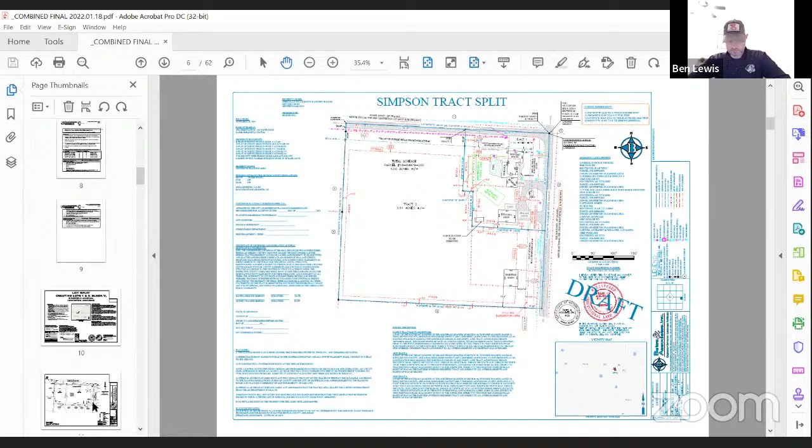This is John. I motion to approve the ratification of admin approvals as prescribed. This is Ben, I'll second. We have a motion and we have a second. Is anyone opposed? All right, thank you guys.

Under old business, we have the subdivision 2106 Crystal Cove Townhomes adjacent street agreement. This is from the southwest corner of Kinyon and Keller Road. It is zoned RTH MF12, 195 multifamily townhome lots, 30.99 acres, and the developer is TriStar Engineering, I guess Swope as well. Who's going to cover this from the staff?

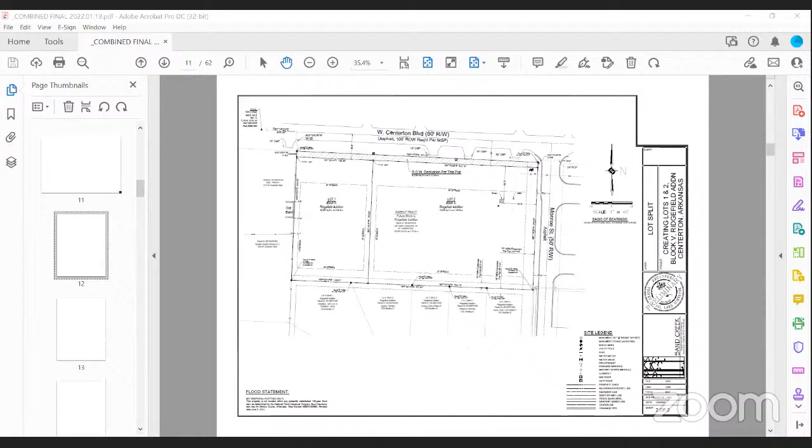I will. This is Diane, and I'm trying to look for the packet I just made for that and combined in here, and apparently my computer decided it didn't want to do that. And Jeff, did you want to go over the Zoom meeting instructions now or when we do the public hearing? I'll do them here in just a second when we do the public hearing. All right, I just wanted to double check since it's been a bit.

Now, where did it go? Hang on just a second and I will bring it up. We were working on this until about 10 minutes before the meeting. So let me go find where it got saved. Oh, I better know where it went.

While you're looking, Diane, I will go ahead and cover these since they're up on the screen. Thank you, I'm sorry.

Because we did go virtual this evening, there are going to be two public hearings. They actually involve the same parcel. So when we get to the public hearing, there will be a comment section, and there are two ways that you can ask questions or share comments, listed on the screen here. One, if you joined us virtually, there's a raise the hand button at the top, and once you press raise your hand, we can recognize you to speak. If you joined by telephone, you can press star 9 and that will raise your hand, and then you can be recognized. We only see the last 4 digits of the telephone, so we'll recognize you by telephone number. If you do speak, either virtually or by phone, we ask that you state your name and your address and/or interest in the property being discussed.

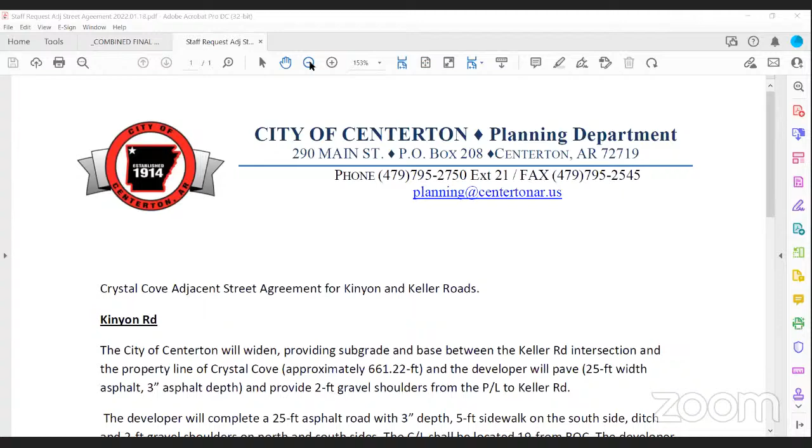Can you see my screen that I have up there? Yes. All right, we did just meet with Phil Swope this afternoon, just a few minutes before this meeting, and this is what was finally agreed upon for Kinyon Road and Keller Road. This is the Crystal Cove Townhomes. It's kind of an L-shaped that meets up with Keller on the west, Keller on the east, and Kinyon Road on the north. So they would be doing improvements to a portion of Kinyon Road and then a portion of Keller.

They will be doing, but now apparently the City of Centerton—correct me if I'm wrong, Phil, from what we talked about earlier—you guys are going to be doing all of the improvements yourselves for Kinyon Road, correct?

Let me allow him to talk. I've hit that, okay, thank you. Yes, that's right, Diane, that is what we agreed to.

Okay, so that's different than what it says here though, if I'm correct, because we just worked this out this afternoon, like 10 minutes before this meeting. So your statement is different than what's on the screen. Correct.

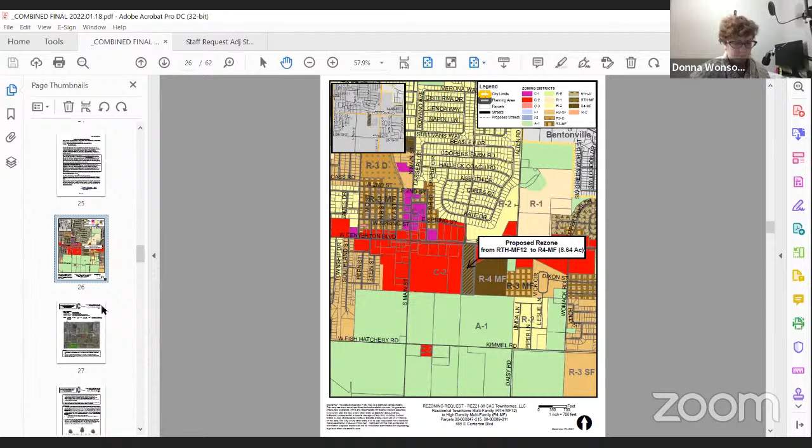So the request is for RTH to R4MF. You did see this one previously in February of this year, where it was rezoned from agriculture to RTH MF12, so that was a fairly recent change. There is the concurrent request to the PUD, which you'll be hearing after this one if this passes. The intent is to develop the property as a second phase of the Stoneleigh apartment complexes, which are immediately adjacent to the east.

The high density multifamily R4MF has a maximum density of 18 units per acre. The proposal is consistent with that. R4MF is subject to general regulations and design standards, which is a recent change to the zoning we adopted. The parcels are currently only accessible through the Stoneleigh apartments, as this is considered phase 2 of that. We're not seeing any real issues with that. Access to the apartments is off of Centerton Boulevard, Highway 102, which is a major arterial.

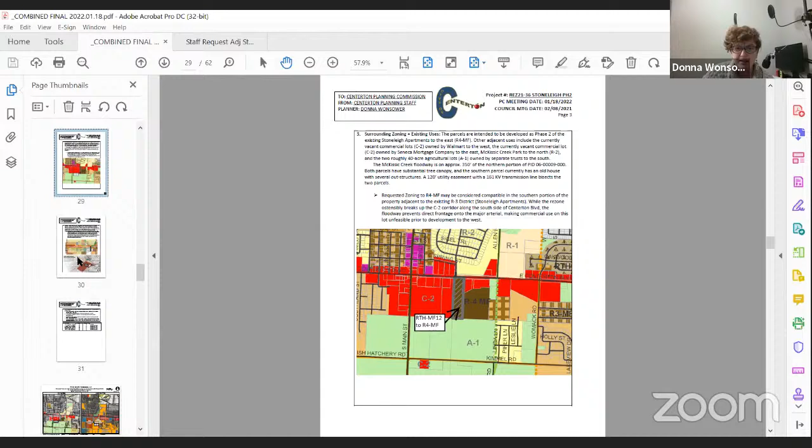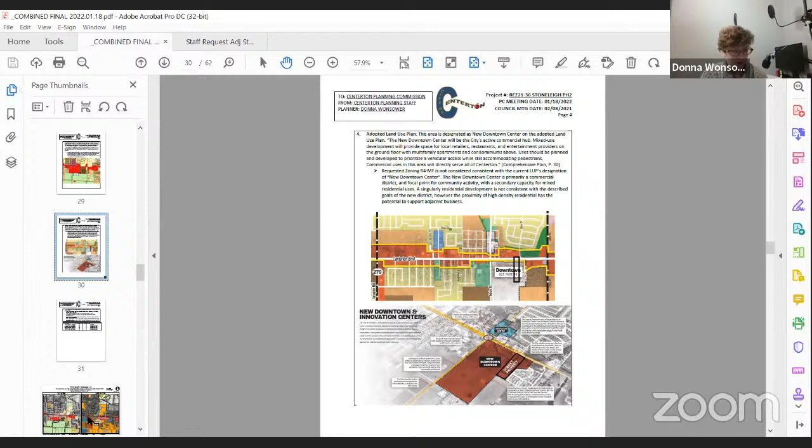So staff considers R4MF compatible, given its proximity to the adjacent Stoneleigh phase 1 and its location off of the Centerton Boulevard corridor. For the adopted land use plan, this area is designated as the new downtown center, described as the city's active commercial hub. There's a heavy emphasis on mixed use. There is some description for multifamily, but it really is a priority towards commercial and mixed use. So given that, the requested zoning is not considered consistent, but it is directly adjacent to the Stoneleigh, and it's kind of on the edge of the downtown center, so it does have the potential to support adjacent commercial within the downtown center. That's something to consider when reviewing this.

So that is the gist of the staff report. If you have any specific questions—there is a wetland, but the general area is outside of it. So if you have any questions, let me know. All right, thank you, Donna.

We will go ahead and open it up to the public now. So with that, I would entertain a motion to open the public hearing. This is John, I motion to open the public hearing for rezone 2136. This is Ben, I second. We have a motion and a second to open the public hearing. Is anyone opposed? All right, thank you for that.

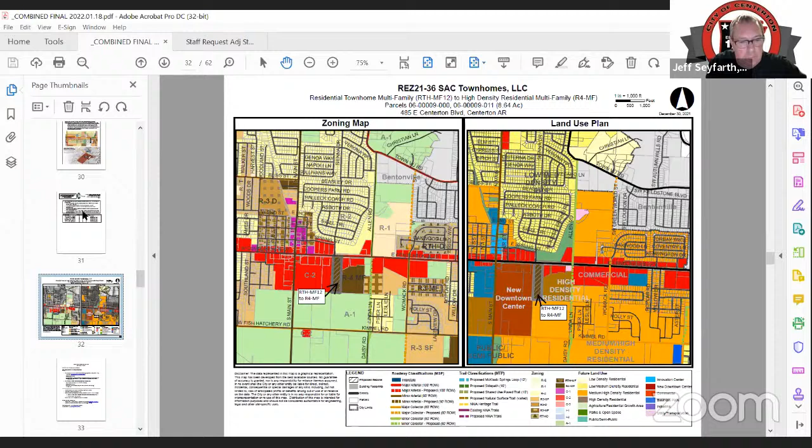All right, let's go through our questions that we need to consider for the rezone from RTH MF12 to R4 multifamily. The first one: is the rezoning consistent with the adopted comprehensive plan, including the adopted land use plan? If not, why?

I remember back when we went through this discussion that this parcel was rather unique with the fact that it had the power lines, it had some water. At that time we also knew the potential for a new downtown to the west would make this a unique piece. If I remember correctly, we asked for direct access from the property that would allow for the growth of that potential new downtown. So while not directly the same as the new downtown area, it would allow for that potential development whenever we went through the first rezone.

So with that, I think there's really a mixed view in regards to this. I would open it up for any of the other commissioners' comments on that.

Jeff, I agree with you. I think with the shape of the parcel and the adjacency to the existing apartment complex, it makes it a difficult one to not integrate into it.

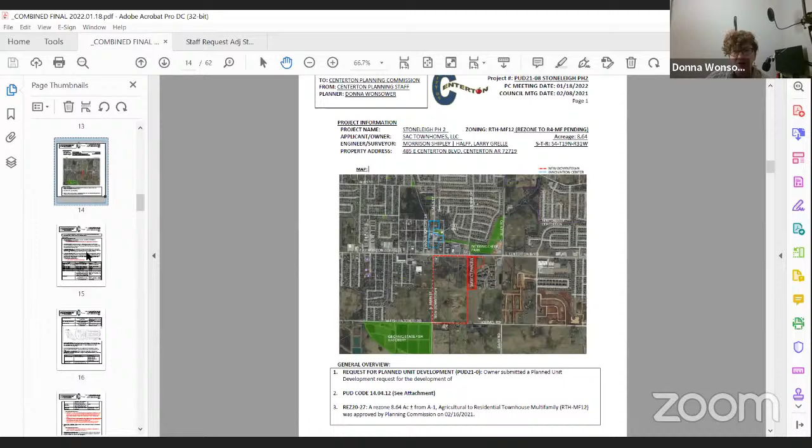So the request is for phase 2 of the Stoneleigh Apartments, as was previously stated. It encompasses 2 parcels. Staff is recommending a lot combination plat prior to construction to simplify the process and make sure those 2 parcels are combined since it is being done as one development.

The uses are multifamily residential. This is consistent with the underlying zoning. With a PUD, the ownership is required to be in single or corporate ownership at the time of filing. This PUD is consistent. The design proposes access from the existing Stoneleigh Apartments with a series of loops around the townhome units south of the large electrical easement, with a spur to the north.

As the development is acting as phase 2 of the existing Stoneleigh Apartments, staff is recommending approval of the reduced side setback to the apartments. So there are a couple of variances which we can make some changes to the setbacks and such with the PUD code. Mostly with side setback, there is a reduction from 25 foot to 15 foot being proposed on the side adjacent to the existing Stoneleigh phase 1.

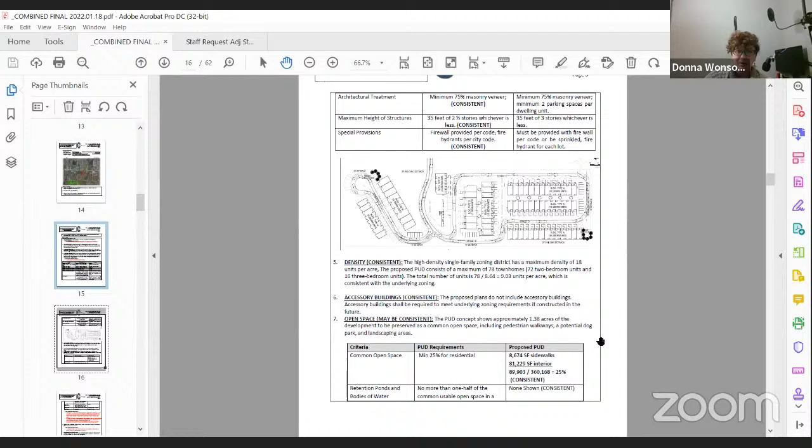The density is about 9.03 units an acre, which is consistent with the underlying zoning code. There are no accessory buildings proposed at this time. The open space is right about 25%, which is the required minimum for a PUD. There is not really any area in here that is above 15%, so we'll take a closer look at that.

It is staying outside of the wetland area, and we'll look at the permanent open space easement whenever we do the large scale development plan. So we will need to have a wetland assessment done, and there will need to be a floodplain permit, just to make sure that the work being done is not impacting the floodplain as it is so close.

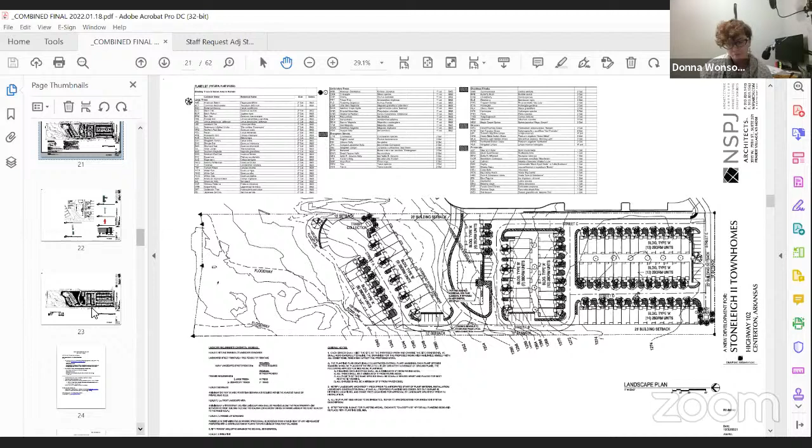The PUD parking code recommends 2 per dwelling unit. This is consistent - it's actually providing more than is strictly required. There are entry signs proposed along the entrances, which is a general condition we typically require with PUDs, that signs have to be reviewed and approved by Anthony.

As far as suitability, the PUD requires that the proposed use of a particular location shall be shown as necessary or desirable, shall provide a service that will contribute to the general well-being of the surrounding area in the city, and shall not be detrimental to the health, safety, and welfare of the persons residing in the vicinity of the PUD or the City as a whole. There are a number of comprehensive plan implementation items that this meets.

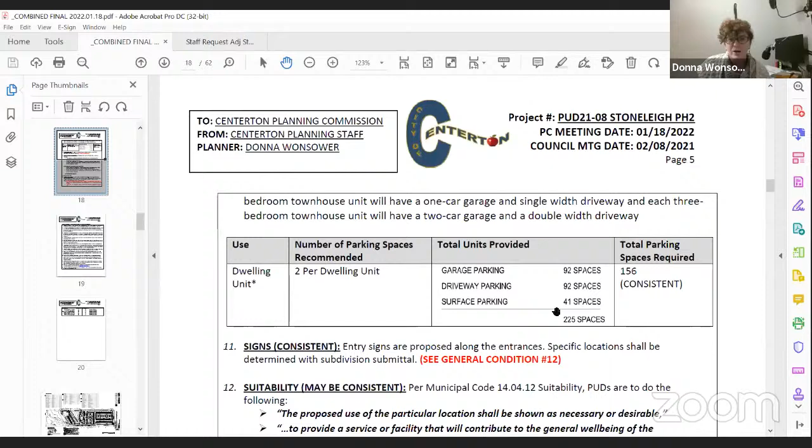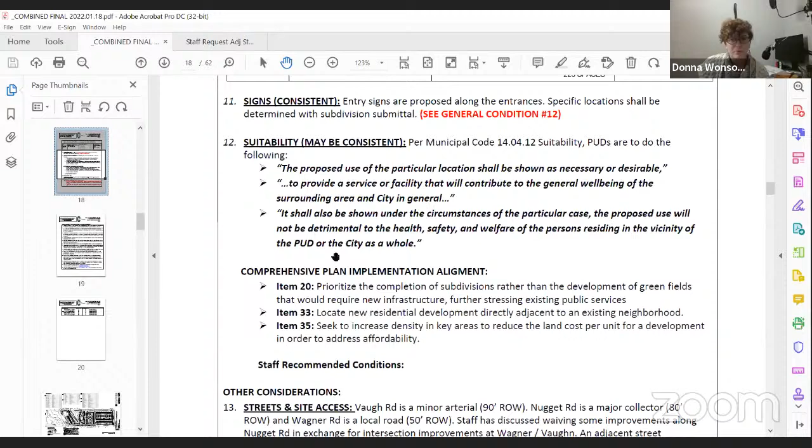We do recommend that with the site connection to Centerton Boulevard, Fire has recommended that that be brought up to existing code. And there were some discussions with the previous PUD regarding a stub out connection to the south, which I don't know that that has been previously discussed, and I apologize if that hasn't. So that is it for the PUD for Stoneleigh.

So I have a question in regards to the access to the property to the west. Was the intention of that stub out to the north to be able to get that way? Or was Street E, I believe it is, where they put the dumpster at the end of it, intended to go to the west?

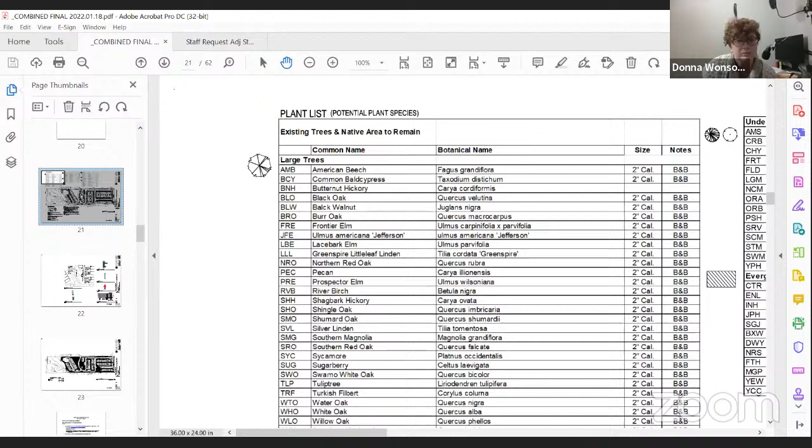Can you bring up the plan, Donna? So where the dumpster is at is not actually Stoneleigh's property - that's the adjacent commercial property. There's 2 of them on here though, correct? Yes, there's 2 accesses. So there's the southernmost access, there's a middle, and then there's a cul-de-sac, and the cul-de-sac has an adjacent dumpster.

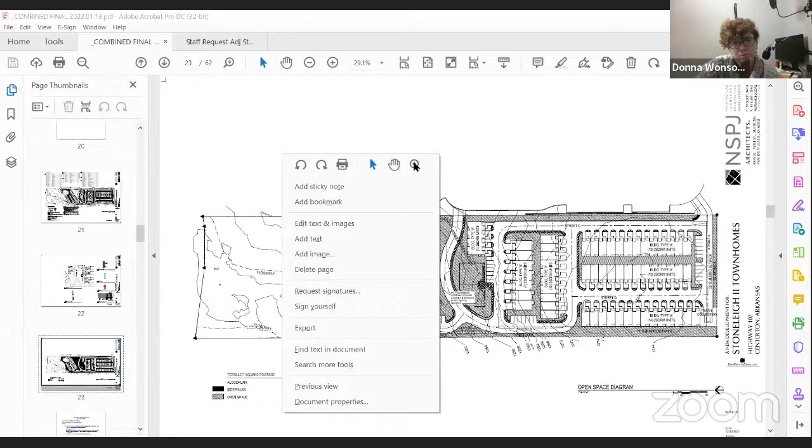What is Street E? Sorry, let me move my screen here. Donna, could you zoom in? Talking about Street E on the south side, Jeff? Yeah, is - to the right is Street E, right?

I think it'd be easy enough to take a drive from Street D and make that go south through Street E, if that's what you're looking for. Yeah, we had many discussions about being able to connect, especially with it being closer to that new downtown area, that the goal was to connect to the west. It may be bike, it may be, we didn't want all the auto traffic, but we did want connectivity there.

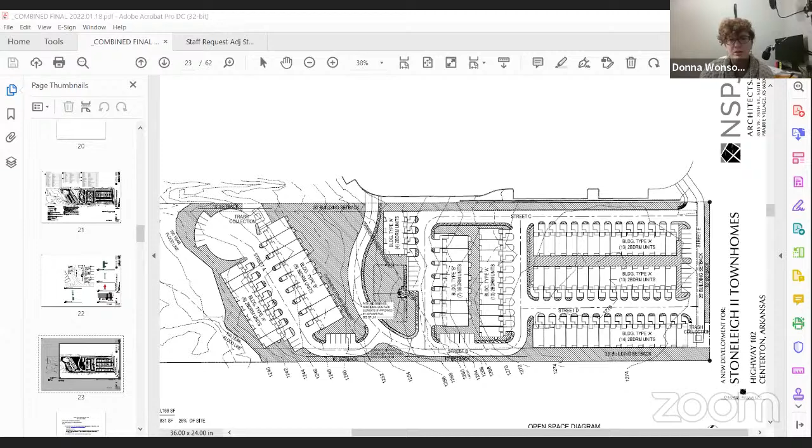We just got the second submittal, and I think that comment might have been missed on the first revision. So I do apologize to Larry for not catching that. I like the north because there's property there as well, but I don't think it gets us anywhere to the west, which is where the large commercial development could potentially be in the future.

Any other comments or questions from any of the commissioners before we open it up to the public? If not, then I would entertain a motion to open the public hearing for PUD 2108, the Stoneleigh II townhomes.

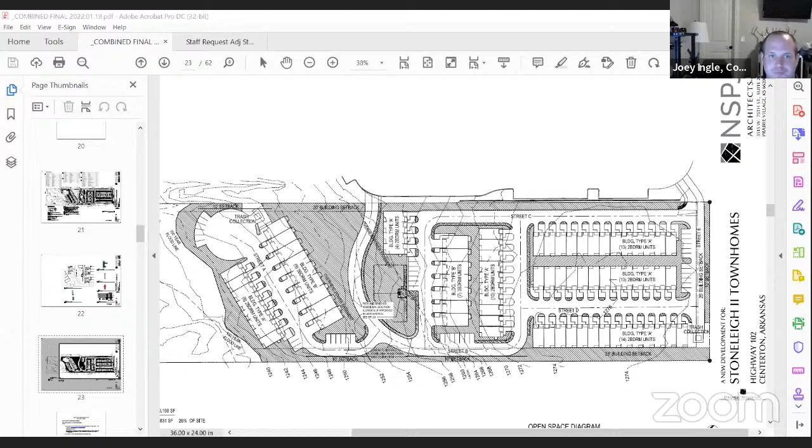This is Ben. I'll make a motion to open the public hearing for PUD 2108. This is Joey, I'll second. We have a motion and we have a second to open the public hearing.

Again, at this time, we are open to the public. If there is anyone who wishes to speak, whether it be a comment or question regarding the PUD, there's two ways to do that. If you're joined virtually, you can press the raise the hand button, or if you join by phone, you can do *9, and then you can be recognized as well.

So with that, is there anyone that wishes to speak regarding PUD 2108? We have no hands raised. Okay, second call for anyone regarding PUD 2108. Still no hands raised. Third and final call for anyone that wishes to speak regarding PUD 2108, the Stoneleigh II townhomes. No hands.

All right, I would also now entertain a motion to close the public hearing. This is Ben, I'll make a motion to close the public hearing. Tony, I second. We have a motion and we have a second. Is anyone opposed? All right, we are now closed on the public hearing.

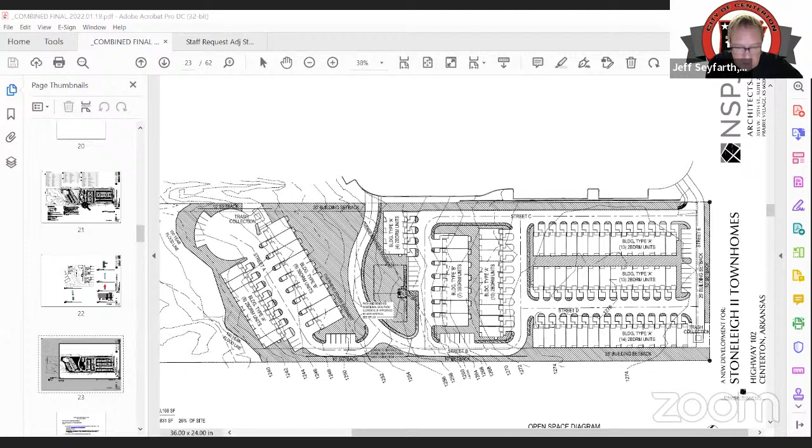Are there any other comments, questions, or concerns from any of the commissioners regarding PUD 2108 Stoneleigh II townhomes?

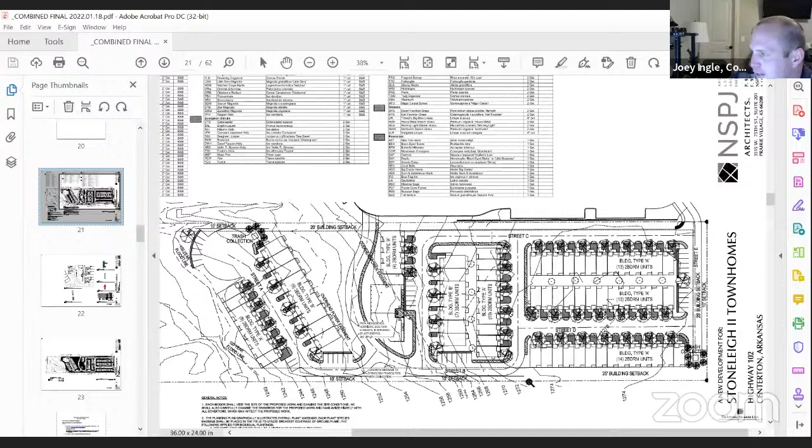The only item I would like to add, the west is kind of a sensitive area for us. I would love to see some trees along that setback area. It looks like there's plenty of room to do that, and then along that south side as well. I don't think it'd be too hard to add some clusters on the south and the west side. I think that would do a lot of good in this situation. But thank you for what you've already proposed, I do appreciate that.

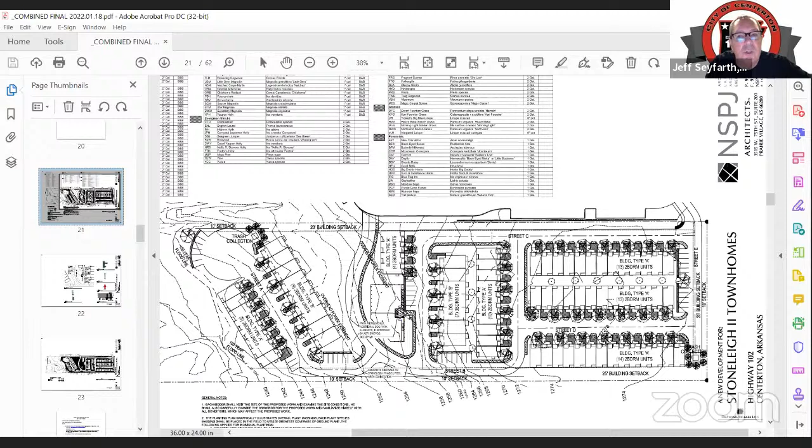So potential trees, of course, the connectivity to the west. Any other comments or questions from any of the other commissioners?

Well, I guess we have one to the south. Just a clarification, north on this page is to the left. So correct, south would be on the right. Correct. Yeah, I just wonder what benefits we get from the south, because it goes directly south would go to the... yeah, so south is good, but we also need to consider the west, for the connection. Correct, yeah, I agree, I think we need both.

Now I don't know that it makes sense to get vehicular traffic through the west. What are your thoughts on that, Jeff? Well, and I know we had that discussion. I would at least like the ability for bicycle, and somehow encourage people to be able to do that, especially with the residences in the current Stoneleigh. Of course, you're adding residents here, somehow encourage them, and I don't know whether that's a stub out from a bike perspective, or a larger trail that heads over that way, maybe something like that.

I think I'd be okay with that. I disagree with vehicle simply because it's so difficult to get in and out, even if we upgrade where the apartments are, and I definitely don't want to put a burden on that any more than it already is. So with the south, I think that's important, and then some sort of, I'll call it encouraging connectivity. I don't have a more creative word to put it, but somehow I think we need to think about that. Hey Jeff, I think... oh go ahead Jerry. I agree with Jeff, I think we need something like that on the west side.

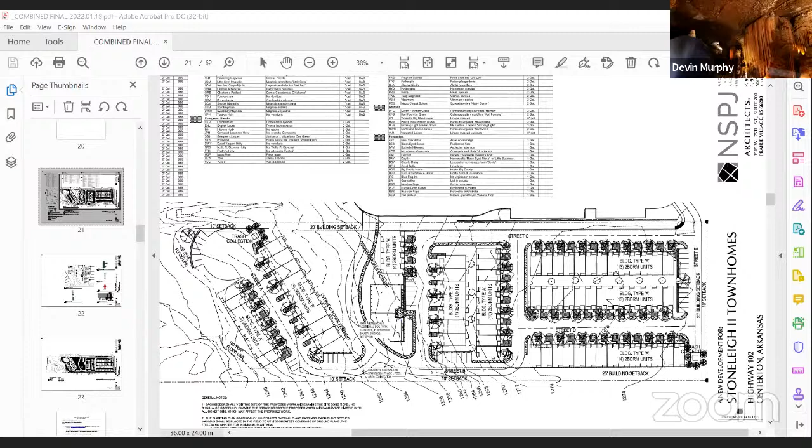Unmute myself. All right, actually have it up this time, I'll do better. Jeff Seyfarth? Yes. Joey Ingle? Yes. Devin Murphy? Yes. Craig Langford? Yes. Amber Beal? Yes. John Sessions? Yes. Ben Lewis? Yes. Jerry Harris? Yes. And Tony Davis? Yes. All right, I think I got it this time.

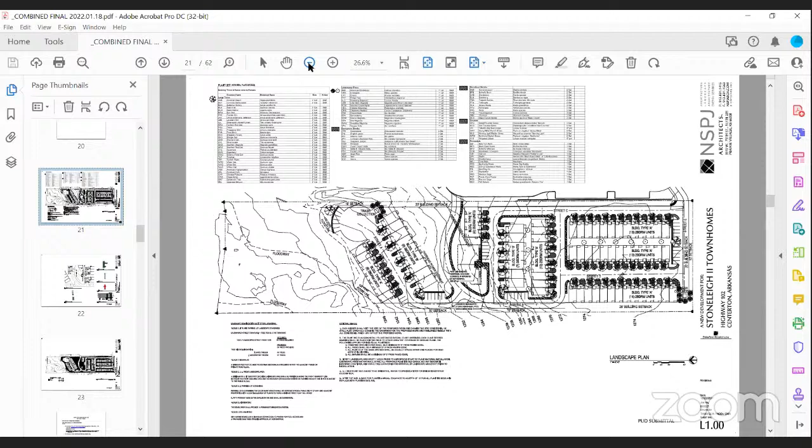Thank you, guys. All right. Thank you, guys. Thanks, Larry. Good luck.

All right, next on the agenda is subdivision 20-01 Brookside Estates final plat. This is at the southwest corner of Brookside and Rainbow Farms Road. As a reminder, it's zoned R3 single family, 142 lots, 39.93 acres. And Diane, I believe this one is you.

Yes, and also we do have Jason Ingalls and Wes Pinkley on here also, so that way you know, since you didn't get your sheet. They are asking for approval of their final plat. This subdivision does have 142 single-family lots on 39.93 acres, and it is located here. Of course we've got Bentonville to the south, and it's in the Centerton city limits. Their covenants have been received and approved by staff.

We have received estimates for their maintenance bonds. We did receive the originals today, but they didn't have the date correct. They had them dated on January 14th, but they have to be dated for the effective date to be the date of city council approval.

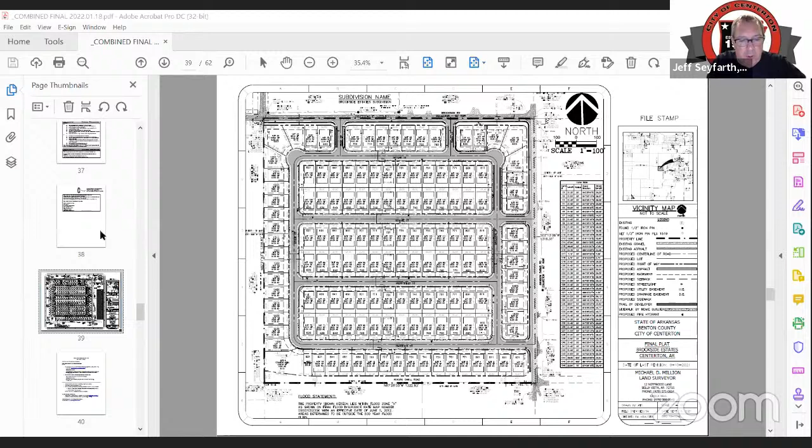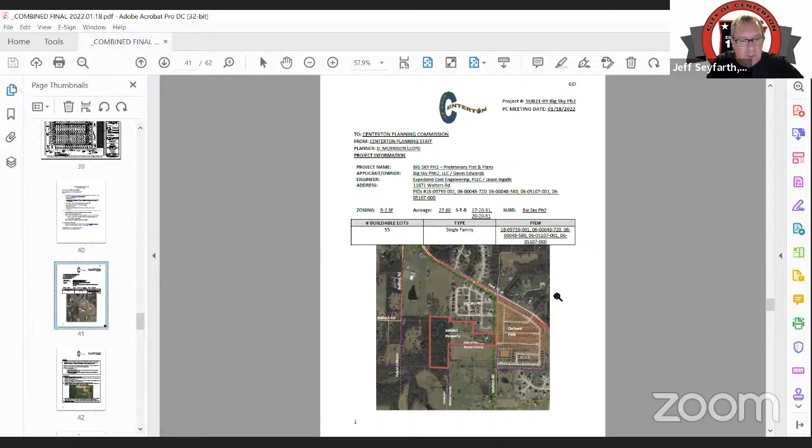All right, next on the agenda this evening is subdivision 2109, Big Sky phase 2 preliminary plat. This is on the west side of Walters Road, south of Big Sky phase 1. It's 55 single family lots, 27.80 acres. It is zoned R2.

And Diane, I believe this one is you as well. Yes, that is correct. And we also have the engineer, which again is also Jason. Wanted to make sure I wasn't getting my engineers confused. And also we have Gavin Edwards on here, who is the developer of this one, just so that you know.

This photo here was kind of a general idea of the subdivision. It's not going to go all the way here or south, it was just very hard to figure out how to draw the jagged edge in there. This, of course, is Big Sky phase 1, so they are continuing on here to phase 2 of Big Sky.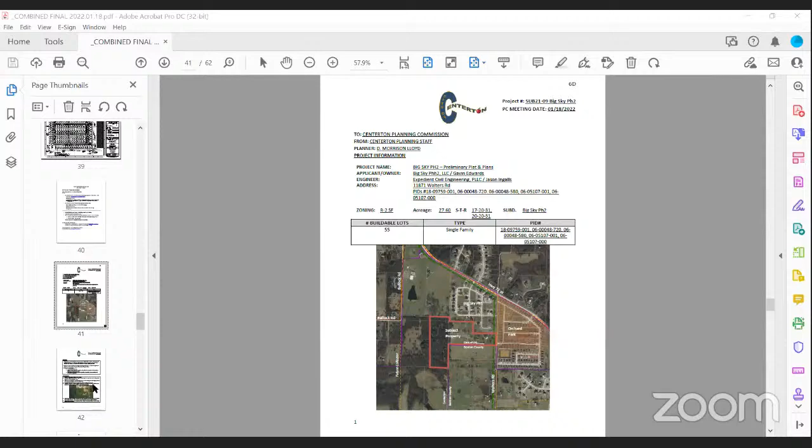It includes 55 buildable single family lots and 2 unbuildable retention lots on 27.6 acres. I know we now have a new R3, but this is R2 single family, medium density single family residential. Back on May 4th, you guys rezoned this from agriculture to R2 single family, and it was approved by the council on May 11th.

Tonight, they are looking for preliminary plat and plans approval. As for the adjacent street improvement agreement, I spoke with Jason earlier today, and like a lot of us, they've been dealing with several people out in his office and would like to bring this back to you guys at a later date for approval. The only adjacent street would be Walters Road, so they would like a little bit more time to look at that, since they are short-staffed also.

If approval is granted, it would be contingent on remaining staff comments. The lots range everywhere from 0.30 acres to 0.68 acres, which is a nice size lot, but on average they're about 0.35 acres. For utility service, they will be connecting to an existing force main in Big Sky phase 1.

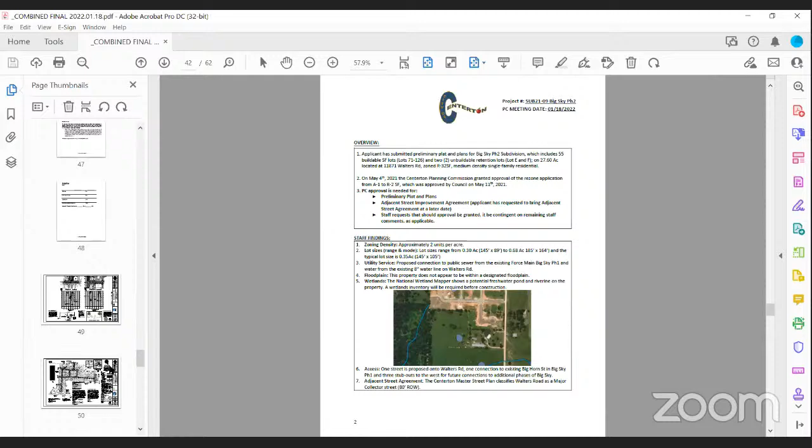And let me get down here to the plans. They will also have, here we go, a connection up here into Big Sky Phase 1. My brain went blank for a second there.

And then 3 stub outs to the future Phase 3, which would be over here to the west of this particular project. The master street plan, of course, designates Walters Road as a major collector of 80 feet.

Of course, it was completely paved with the pines further to the south and also Orchard Park up here on the east, but they still will have to provide any additional right-of-way that's required. Like I said, they are dedicating the 40 feet and also any additional sidewalk, curb and gutter and things to that nature, which they said they will hammer out in the future.

There is a detention pond located in this area and also here in this southeast area. The drainage analysis has received approval from the city engineer, provided that any existing comments are addressed, because there are still outstanding staff comments, especially on the drainage, but John did say it was acceptable for it to come to you guys, provided that it is contingent on existing staff comments.

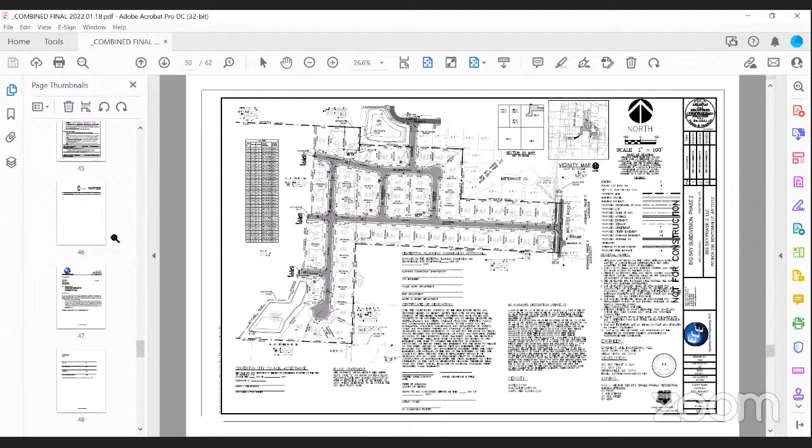There are still several outstanding staff comments. They're all from John, sorry, I'm trying not to make y'all seasick with my scrolling, and they are included in the PC report. That's kind of a summary of that. Feel free to ask me any questions. Like I said, the developer and the project engineer are also on the call.

Jason or Gavin, what are y'all thinking on Walters right now? I know there was a little bit of dialogue in our packet. What are you guys thinking right now? So can you hear me? Yes. Okay, so we're going to do the 8-foot mill and overlay.

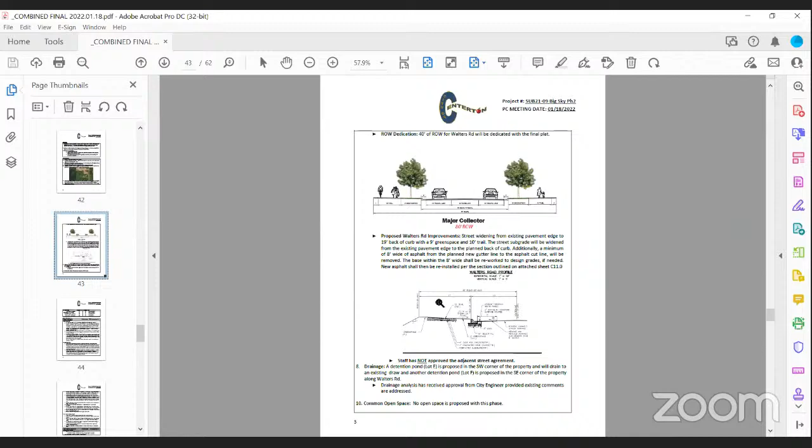That's shown on our plans. It's just, I don't know if the adjacent street agreement got updated. That's why I asked for that to be voted at a later date. But what we show there shows 8 feet from the face of gutter to be milled and overlaid.

I think when we looked at it briefly this morning, we have a meeting with Public Works and Planning just to make sure we're all on the same page and everybody knows what projects are going on. I think they did have a couple of comments on this, but overall you are definitely going in the right direction, especially the mill for that 8 feet. I know they're very happy to see that, so we don't continue to have issues like we've had down on Bush Road and Tycoon.

I'd also, oh go ahead Diane, I'm sorry. I know we did say that we would like to see you list out in the adjacent street agreement anything that will be done within the city right of way, any kind of improvements that will be done in there.

I would just like to add that there are a few comments from the city engineer. Those have been addressed and were resubmitted electronically and paper copies delivered today. City staff has not had a chance to re-review those, but like Diane said, John is in favor of this being approved tonight based on addressing those comments, which will just be reviewing what we submitted today. And then also, Diane, I'd also like to add about the riverine.

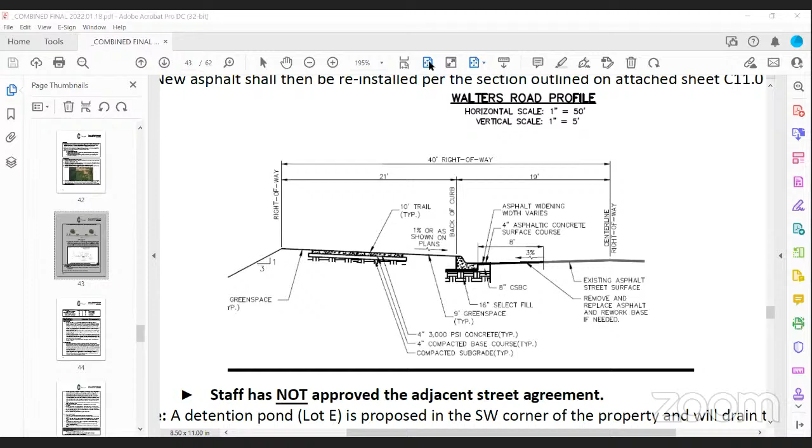I'll answer any questions you have. Thanks, Jason. Any comments, questions, or concerns from any of the other commissioners?

If there are no other comments or concerns, again, they're asking for preliminary plat approval this evening. We will consider the adjacent street agreement at a later meeting, I think, once details are finalized, so that we'll have a good picture of what that is. So this evening, what they're asking for is preliminary plat approval. Again, it's 55 single-family lots zoned R2.

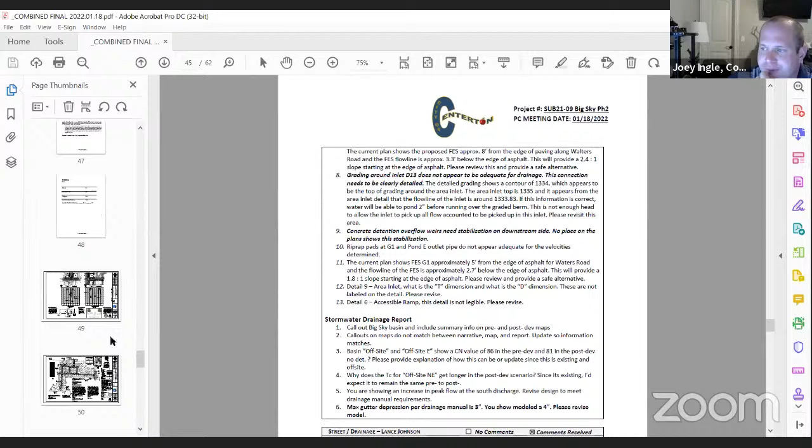If there are no other comments or questions, I would entertain a motion for subdivision 2109. This is Joey, I'll make a motion to approve subdivision 2109 with the outstanding staff comments. This is Ben, Craig, I'll second. All right, we have a motion and we have a second. Is there anyone that's opposed? All right, thanks Jason and Gavin.

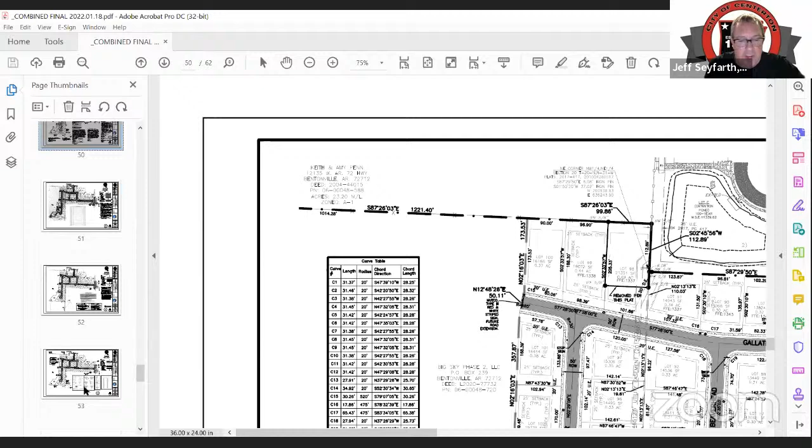All right, next on the agenda this evening is subdivision 2120, Annika Estates Phase 2, final plat. This is the south side of Holloway Road, adjacent to Annika Estates Phase 1. It is 67 single-family lots, just over 17 acres, lots 73 through 140, and it is zoned R3. And Donna, I believe this one is yours.

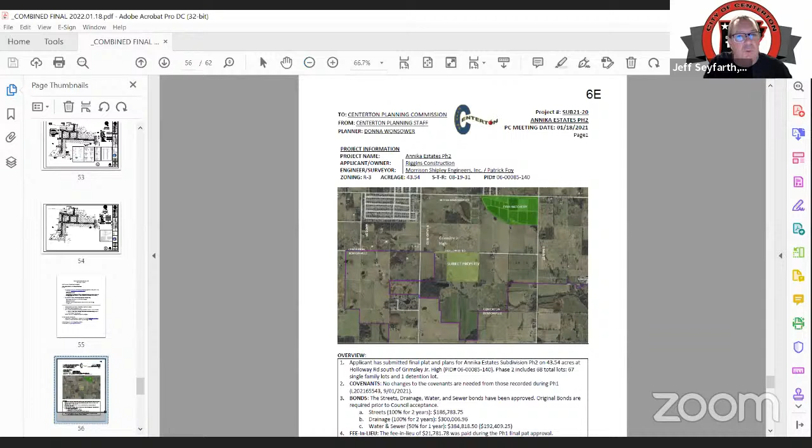That's correct, so this is phase 2 of Annika Estates. The covenants were previously recorded during phase 1, and there are no changes needed.

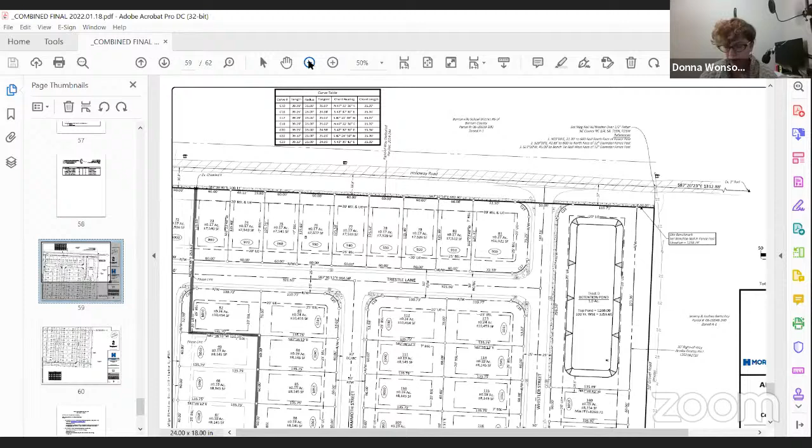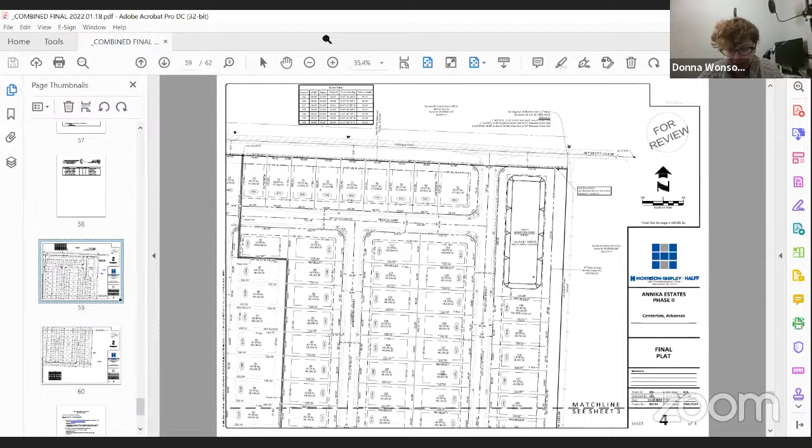We have received bonds since this report was updated. The streets are $186,783.75. Drainage is $300,006.96. Water and sewer is $364,818.50. We received the full fee payment during final plat approval, so there was no need for additional money during this phase.

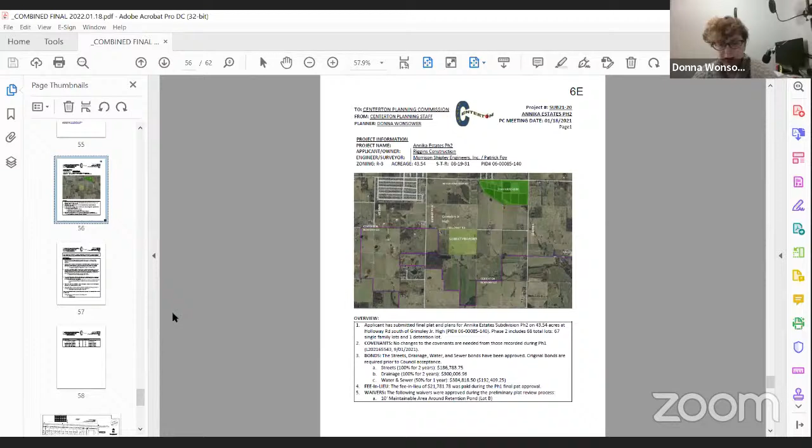There were some waivers that were approved, a 10-foot maintainable area around Lot 8, that was approved during preliminary plat. So there are minor site inspection items left, general site stabilization and some additional compaction tests that are needed by building safety. Other than that, the site's in good shape.

This is phasing approved during preliminary plat. The adjacent street agreement, there was a swale that was adjacent to Holloway Road, as well as new 5-foot sidewalk. Those have been completed and accepted by staff. The fee in lieu has been paid. There were right-of-way dedication completed with phase 1.

We're still waiting on some comments from the staff, Morrison Shipley's, from CEI surveyor. Otherwise, we don't have any comments regarding the final plat. And there's really limited comments on the record drawings and drainage report.

Generally labels, clarifications. The drainage report has been approved by staff. So we need planning commission approval on the final plat and the warranty bonds, as the covenants have already been approved. This one will also be part of the special meeting for city council approval tomorrow, just so you're aware.

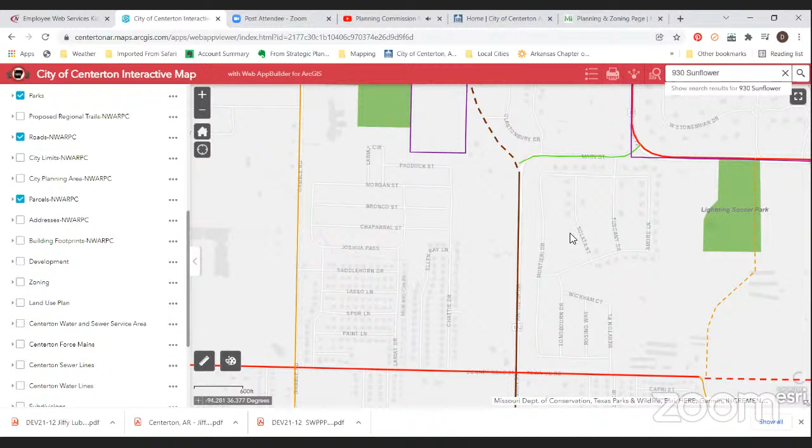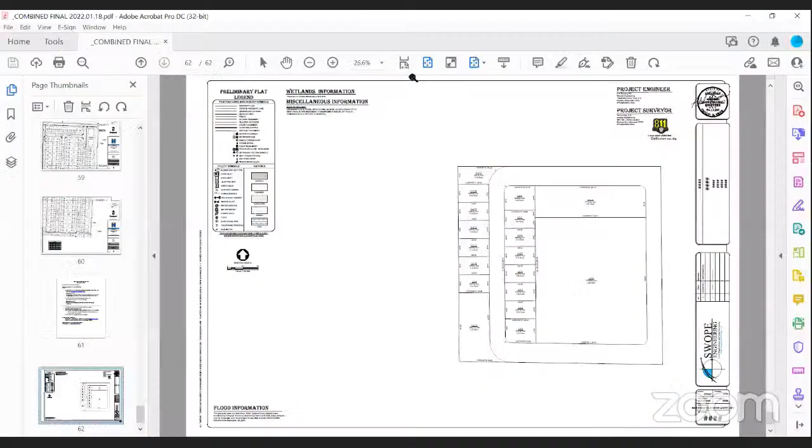The land use plan does show it all as commercial. The conceptual that we have sent in, we've got roughly 3.5 acres highway frontage of commercial, and then 15, 60 by 100 single family lots behind that. I think the previous submittals too, they had requested either multifamily 12 or duplexes, something multifamily. So we were thinking single family might be better here. But we just kind of wanted to get your guys' thoughts on this. Any feedback, if you felt like this would work, what you would like to see here. We're kind of open to suggestions on it.

Yeah, like I said, this Diane, is Main Street, and I'll see if my map will cooperate with me now. But what did you need, Jeff? I'm sorry. So remind me again, I know we've seen this at least twice, if not 3 times. I just want to make sure that we don't give guidance or direction based on something we've already denied in the past. And I know part of it was a mix like this. I can't remember if there were any single family. It seemed like there were maybe some duplexes. Do you have the record of what all we have denied?

Donna, do you recall? Because those were all Donna's projects. So I will let her answer to that one. But if the properties, they're right in here. I don't know why my parcels are not coming up. We'll just refresh and see if that works. Can only see the PDF, Diane. Oh, I'm sorry, I forgot to screen share again. My bad, you guys. This is on Main Street. It's just north of the PUD that we just did.

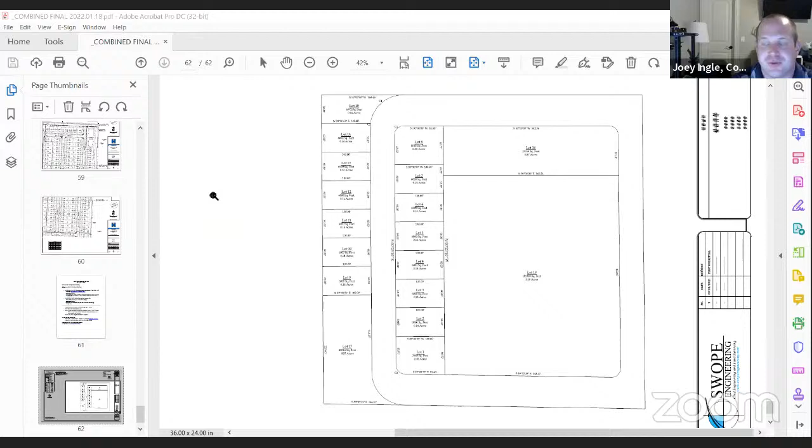So I appreciate your time. All right, thank you. Hey Elizabeth, if you haven't seen it, I would recommend getting with staff and trying to get a copy of that PUD that's just to the south of you, I believe it's 20 acres. Yeah, Diane had mentioned that to me previously about what all was going to go in down there. So I'll meet with her again on it. And I can happily send that to you also.

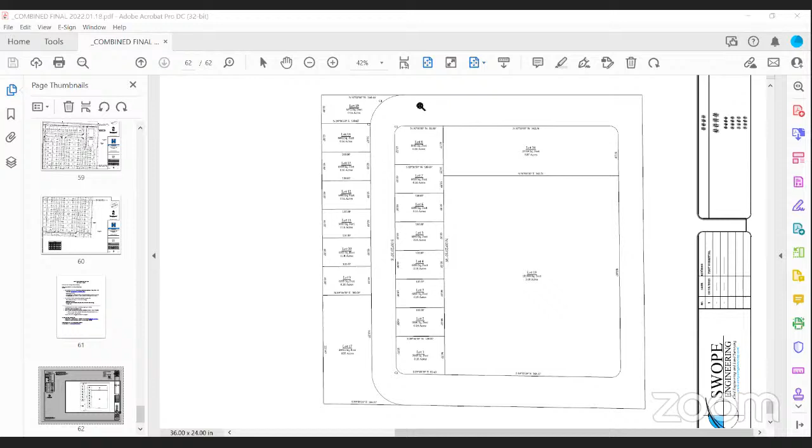Okay, sounds great. And approved. All right, thanks Diane, Donna, Joey.

Under announcements, there is a tech review on 2-3, which is actually after our next planning meeting. There is a special council meeting tomorrow evening, as was mentioned, where they'll be considering the 2 plats we did this evening. Our next regular scheduled planning commission meeting is 2-1. I would encourage you to be flexible. I appreciate the flexibility this evening in regards to going virtual. So I would plan on in person unless you hear otherwise. Our next meeting is scheduled for 2/1, and the next council meeting after that is 2/8.

Any other comments or anything from staff or any of the commissioners? This is Jerry, I was just curious, any idea when we're gonna get into the new building? Mayor, I believe Bill can answer.

Go ahead, Bill. Yeah, so I just got contacted, some of our furniture is going to start arriving this week. So to answer your question, we hope in the next 30 days or so. They're finishing up the AV system stuff over there now. They still got some other things to do, but we hope within the next... Thank you. Thanks, Mayor Bill.